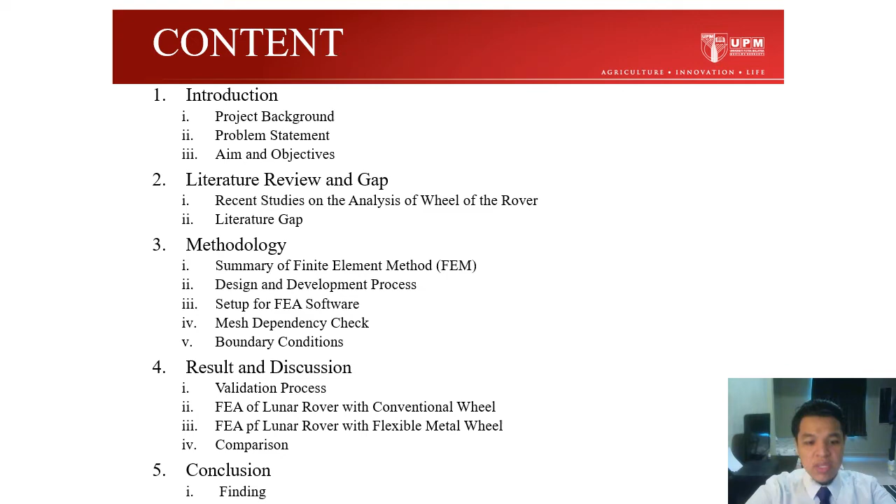My presentation for today will be divided into 5 sections: introduction, literature review and gap, methodology, result and discussion, and conclusion. So firstly, let's take a look at the introduction.

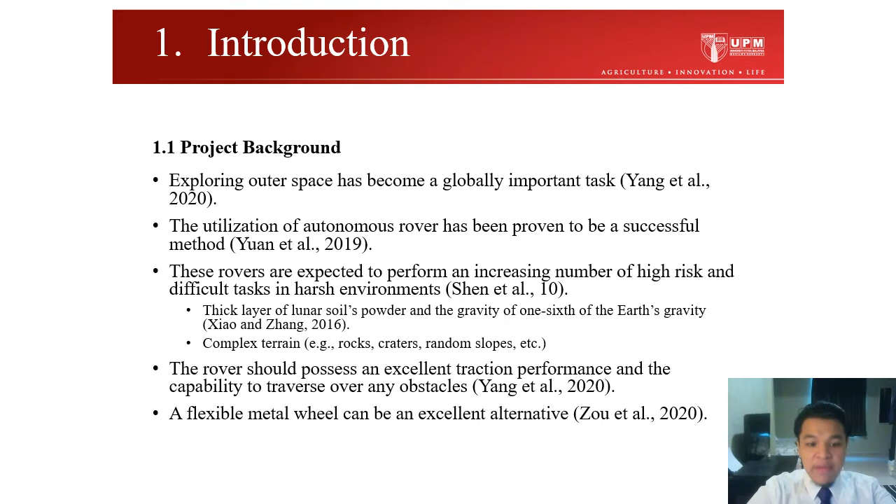First is project background. Exploring outer space has become a globally important task according to Yang et al. According to Yuan et al., the utilization of autonomous rovers has been proven to be a successful method, but these rovers are expected to perform an increasing number of high-risk and difficult tasks in harsh environments, such as a thick layer of lunar soil powder and gravity that is 1/6 of Earth's gravity, along with complex terrain like rocks, craters, and random slopes. According to Yang, the rover should possess excellent traction performance and the capability to traverse obstacles. A flexible metal wheel can be an excellent alternative, according to Zou et al.

Then we will take a look at the problem statement. A manned or unmanned lunar rover is typically loaded with a payload and travels over complex terrains. Conventional wheels, such as rigid wheels and pneumatic wheels, often impose a substantial amount of stress and strain on critical components of the rover, including the metal motor casing, drive shaft, and the frame.

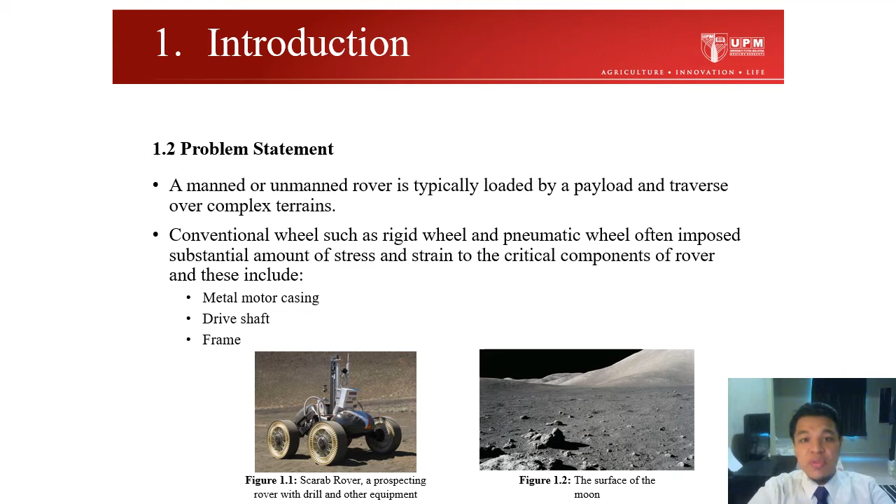Then, what is the aim and objective for this project? The aim of this project is to investigate the performance of the lunar rover implemented with conventional wheels, and second, to investigate the performance of the lunar rover implemented with flexible metal wheels. There are 3 objectives for this project.

The first objective is to conduct finite element analysis simulation of the flexible metal wheel design and validate it with the simulation data from Zou et al. The second objective is to perform static load simulation for both models, the lunar rover with conventional wheel and the lunar rover with flexible metal wheel. The third objective is to compare the mechanical properties and identify the location of concentrated stress and strain distribution between these models.

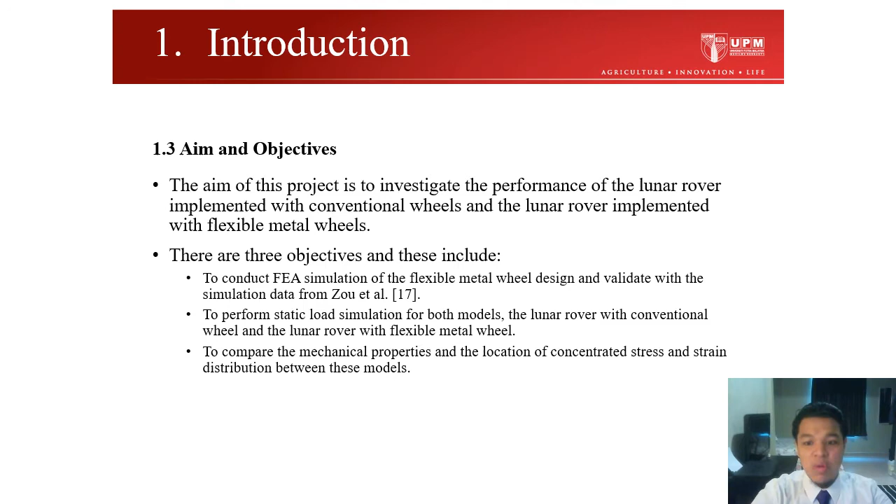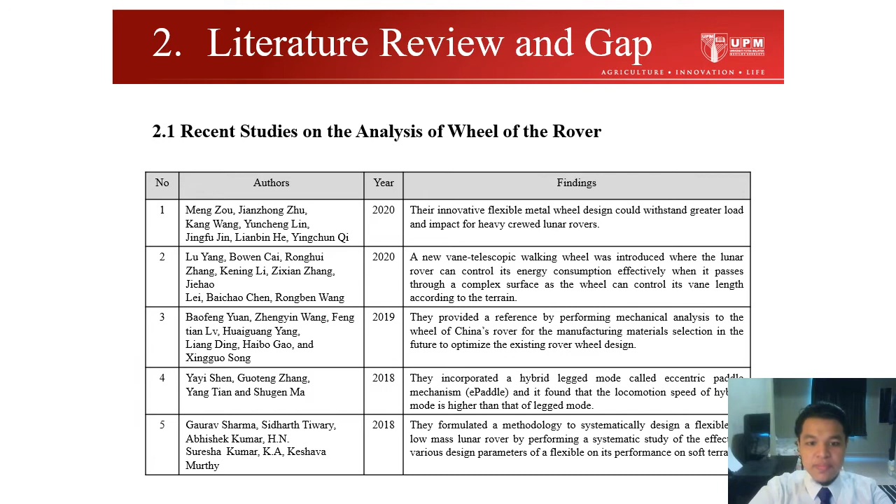As you can see based on the bar charts below, the number of literature findings according to the parts of the rover shows the wheel overcomes all of the major parts of the rover, instead of chassis or frame, suspension, bearing, and others.

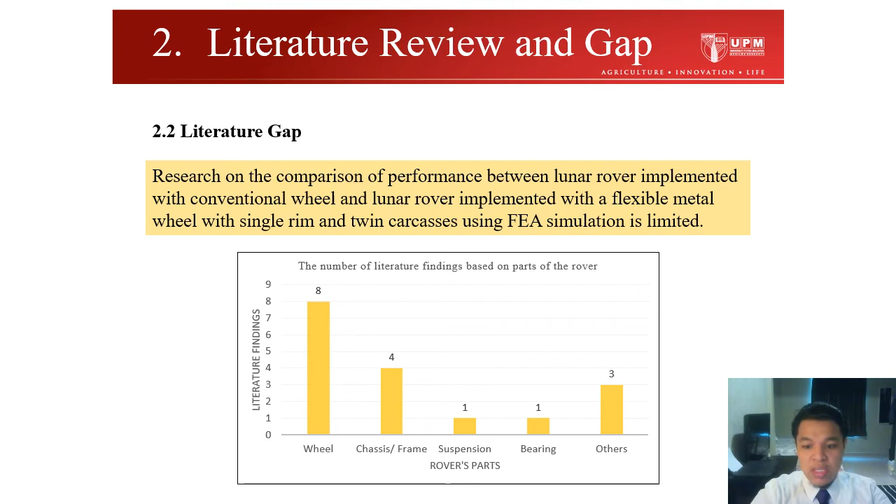So next we will take a look at the methodology. These are the summary of the finite element method. As you can see, there are 2 colors in the boxes, green and blue. The first color represents the responsibility of the engineer, while the second color represents the responsibility of the software itself.

As you can see in the summary of the finite element method, firstly we define the problem: the materials, the loads, the boundary conditions, and then we perform discretization or meshing process. Then we define the element stiffness matrix or variational method. After that, the software will assemble the global stiffness matrix and solve it. Finally, we perform post-processing and validation.

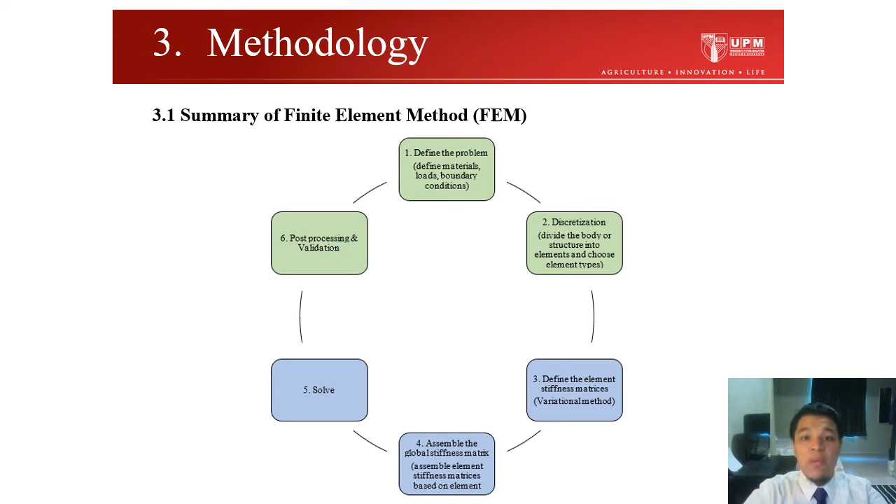So firstly is the design and development process. There are 3 models that were designed, including conventional wheel, flexible metal wheel, and lunar rover. These models were designed using CATIA V5R21.

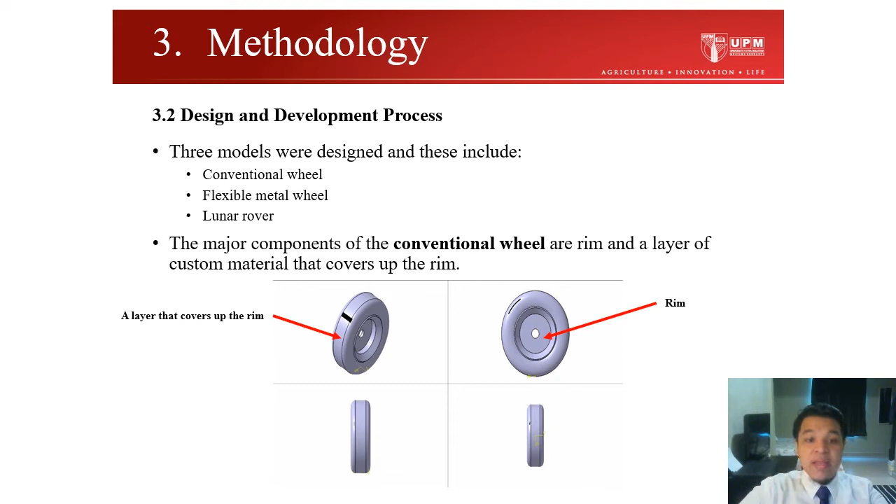So we take a look at the major components of the conventional wheel, which include a rim and a layer that covers the rim. Then we take a look at the second model, the flexible metal wheel. These wheels are composed of twin carcasses with 36 spring steel sheets on each carcass, a connecting ring, and also a rim.

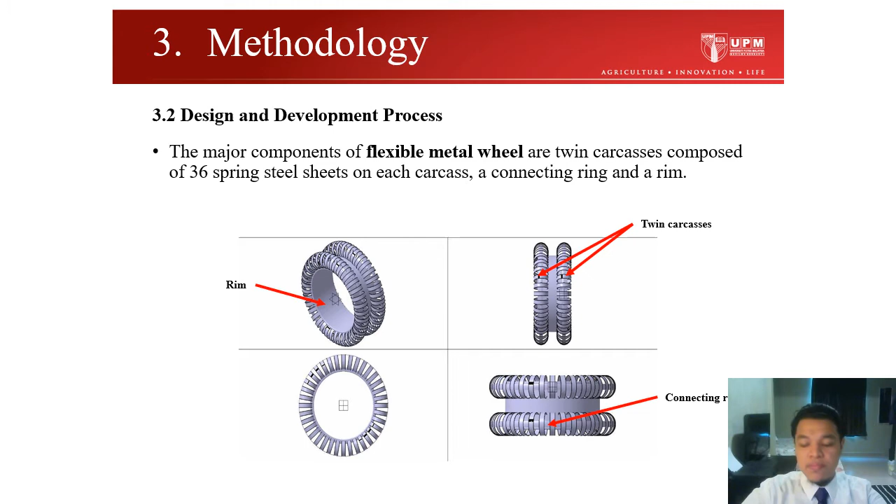Then we take a look at the lunar rover. The major components of the lunar rover include the rim, frame, drive shaft, and solid motor casing, also the base.

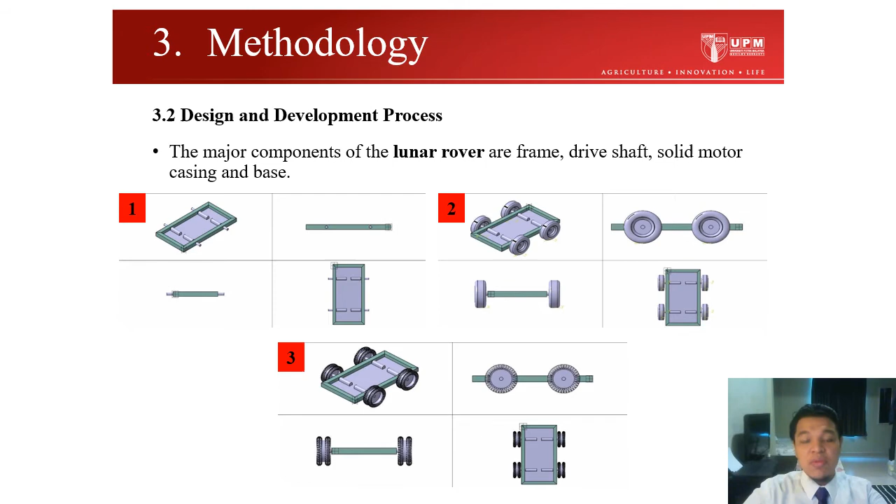Then these are the setup that I use for the finite element analysis software. Firstly is the material definition. Based on the models that I showed you earlier, as you can see for the lunar rover, all of the major components are assigned aluminum alloy. For the conventional wheel, the rim uses aluminum alloy, while the wheel belt is a custom material.

For the flexible metal wheel, the rim uses aluminum alloy, while the twin carcasses and connecting ring use a custom material. Based on the table on the right, the specification of the custom material is obtained from the research paper by Zou et al., as you can see right here.

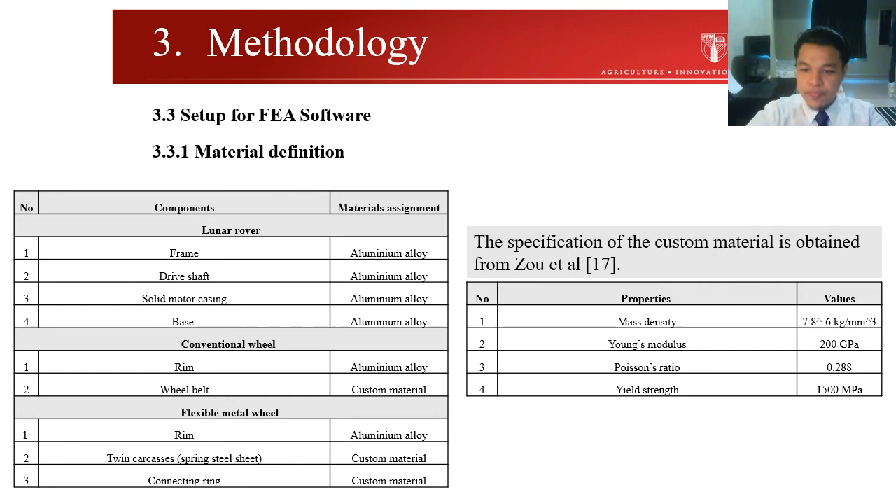And then for mesh generation, after we have designed and assigned all of the materials accordingly, we can perform the mesh generation after importing the 3D models into the software. The meshing process is done by utilizing ANSYS Mechanical, and it is crucial to determine which parts of the model need to be meshed and which parts do not. For example, the design of the lunar rover has been simplified by discarding the bolts, the nuts, the screws, and also the metal chains.

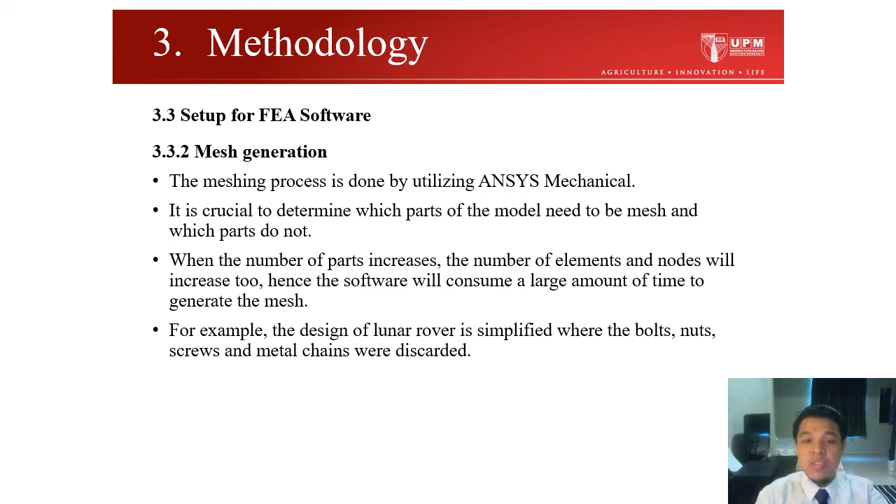Because if we increase the useless parts, in other words, the number of elements will increase, the software will consume a large amount of time to generate the mesh. So we try our best to identify which parts will not be used, and then we just concentrate on the parts that are crucial.

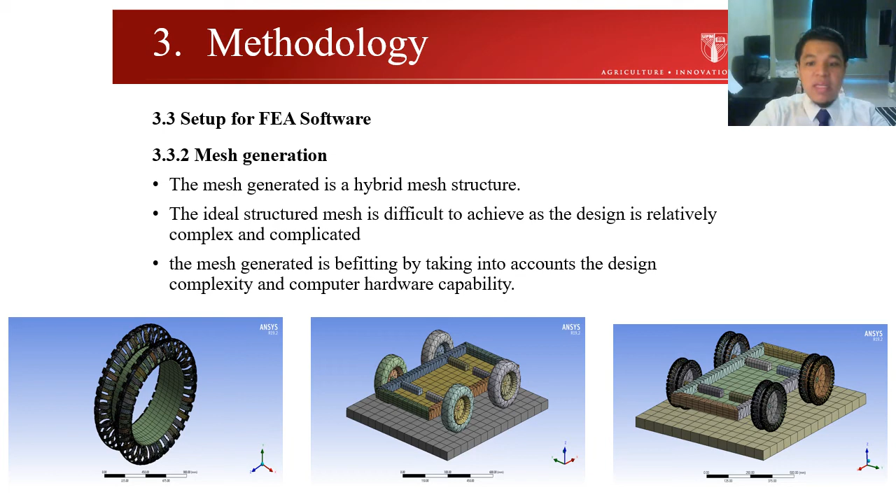So these are the mesh generated by each model by the software. The mesh generated is a hybrid mesh structure. The ideal structured mesh is very difficult to achieve as the design is relatively complex and complicated. So the mesh generated is befitting by taking into account the design complexity and computer hardware capability.

And then we have to perform mesh dependency check, because the result becomes more accurate when the mesh model is finer, and the computation time is greater as the mesh is made finer. The main objective for mesh dependency check is to obtain a mesh that balances satisfactorily the computing resources and accuracy. In this study, there are 4 numbers of elements used for mesh dependency check. These numbers are according to the slide that I showed.

This is the mesh dependency check for a lunar rover with a conventional wheel loaded with a 500 Newton load. The number of elements for the third solution, which is 213076, can be a modest option for the element number to perform static load simulation of a lunar rover with conventional wheels, considering the computation time and result precision.

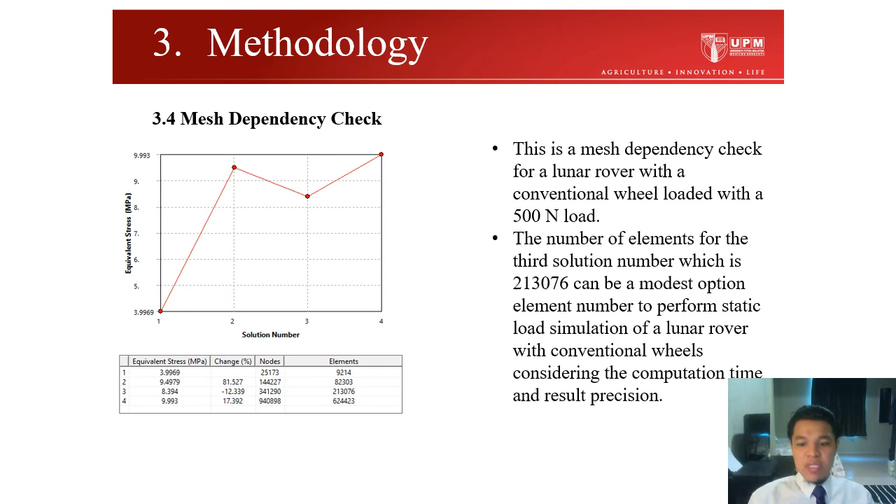During mesh dependency check, I encountered some problems - the software was unable to generate a finer mesh for simulations in the validation process and simulation for lunar rover with flexible metal design. This is due to the limited computation resources, as the solver had insufficient memory to get the solution, and unspecified specifications of some parts of the flexible metal wheel design, like the thickness and width of the connecting rim and the rim, are not stated in the research paper. So the solution to my problem is the simulations were conducted, but by using the default mesh generated by the software.

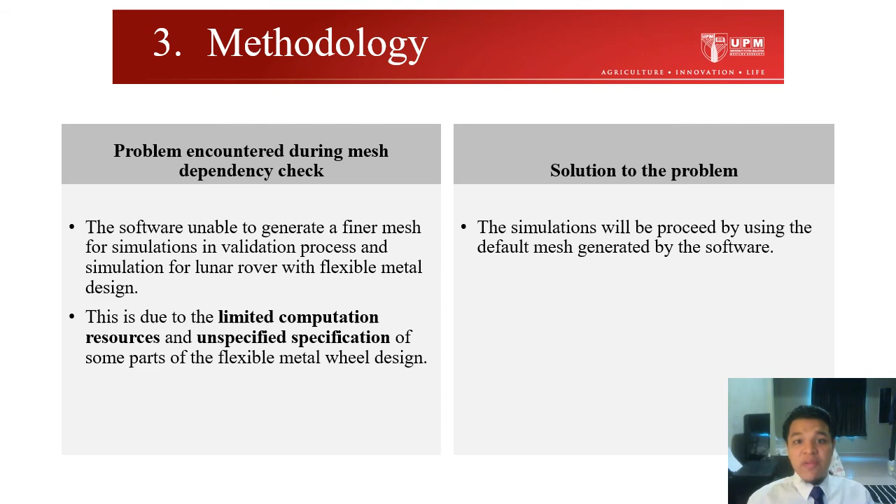So boundary conditions - these are the boundary conditions for validation process simulations, and also the static simulation for lunar rover with conventional wheel, and static simulation for lunar rover with flexible metal wheel.

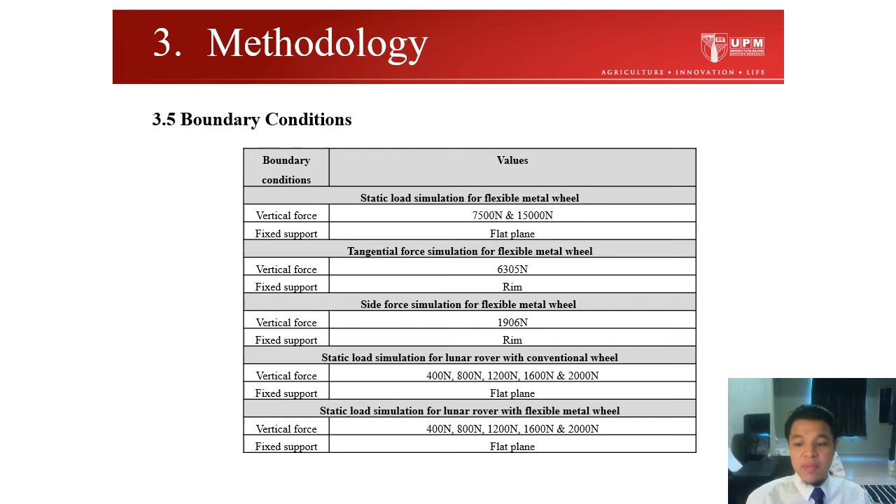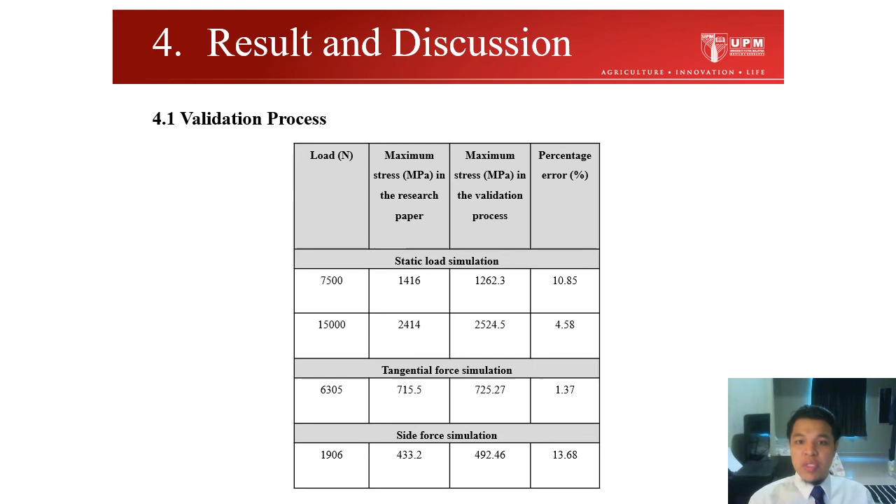So next we take a look at the results and discussion. In the validation process, most of the results tally with the research paper. As you can see at the percentage error, there are only 10 to 15% percentage error, meaning the design is valid to be used in the static simulation of the lunar rover later on.

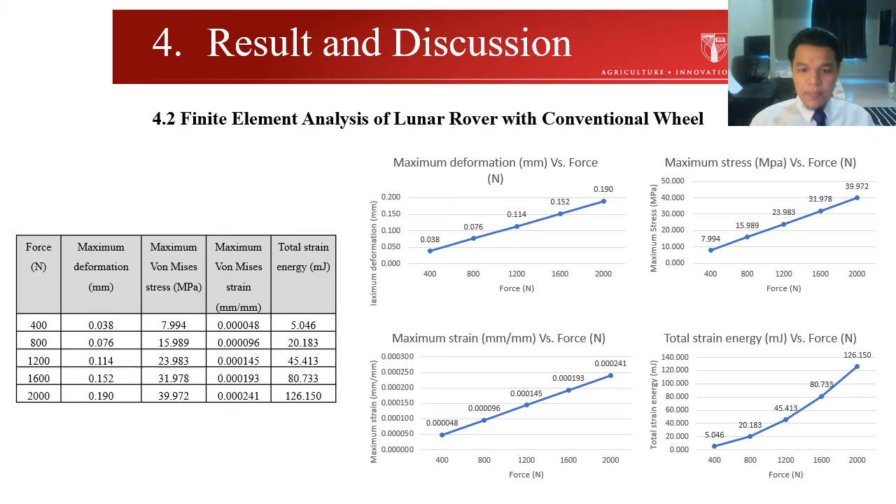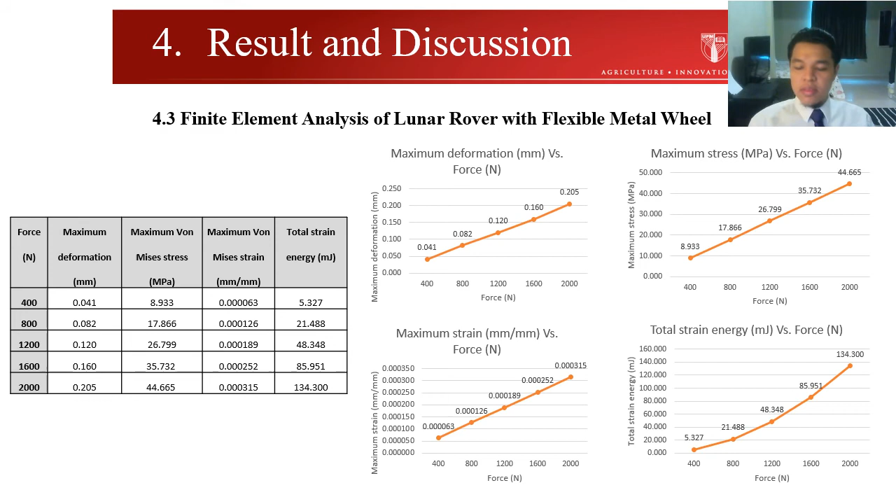So this is the results of finite element analysis of lunar rover with conventional wheel. And the finite element analysis of lunar rover with flexible metal wheel, and these are the comparisons of lunar rover with conventional wheel and lunar rover with flexible metal wheel.

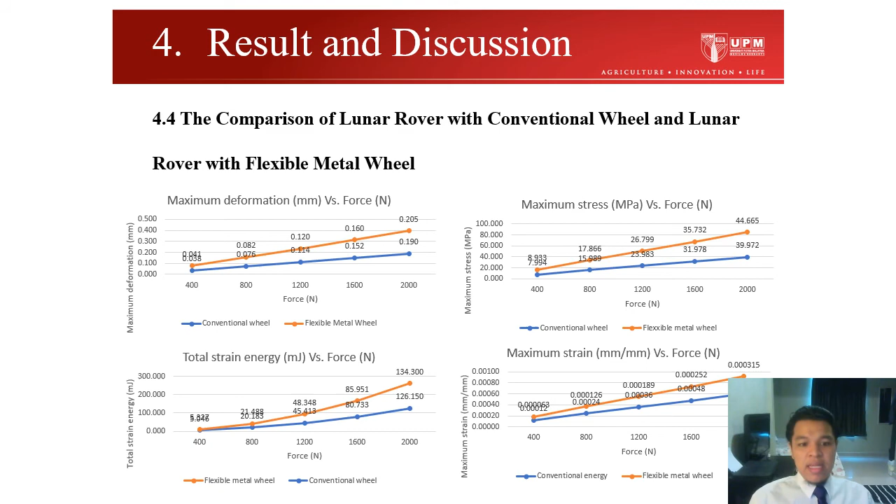As you can see, the mechanical properties of the flexible metal wheel are slightly higher than the conventional wheel - 7 to 8% for the maximum deformation, 11 to 15% for maximum von Mises stress, and 30% for the strain. The mechanical properties of lunar rover with flexible metal wheel are moderately higher than other mechanical properties. And for the total strain energy, the maximum percentage difference is only 6.46%.

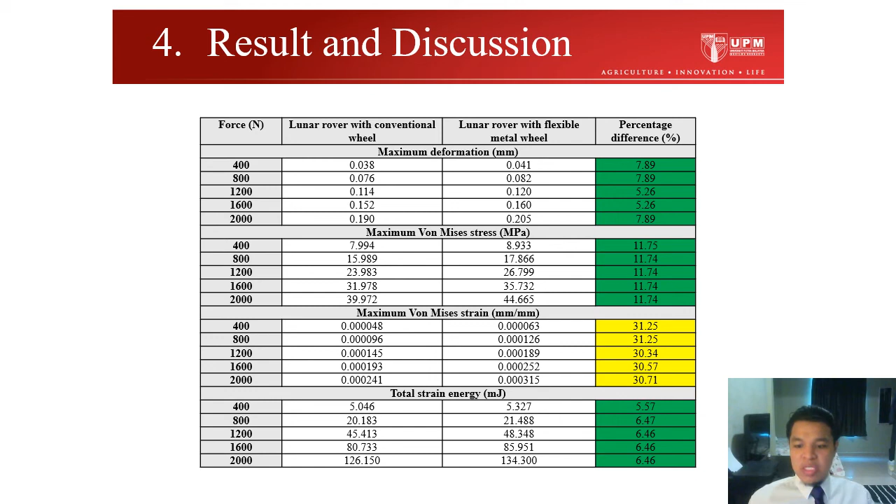Next, the location of the maximum strain is also located at the drive shaft, at the critical component of the lunar rover, while the maximum strain, on the other hand, when the lunar rover is implemented with flexible metal wheel, is located at the body of the lunar rover, or frame of the lunar rover.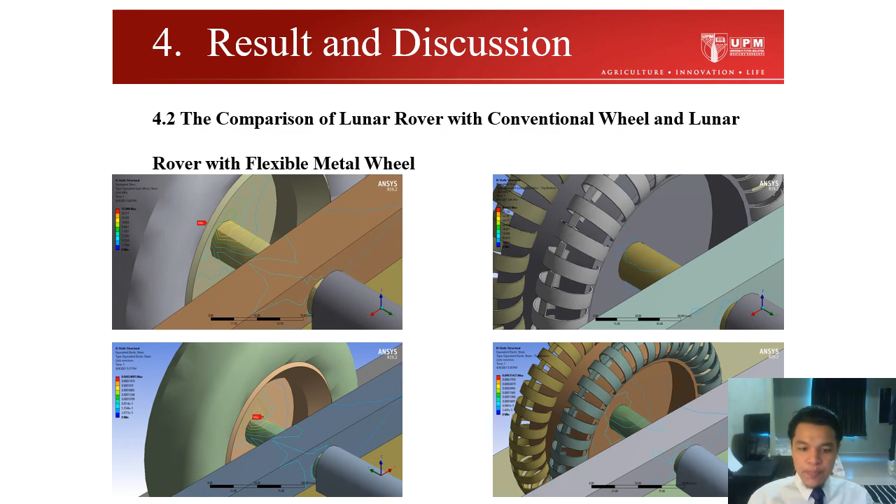So, conclusion: the mechanical performance between the lunar rover implemented with a conventional wheel and lunar rover implemented with flexible metal wheel are considerably similar, with only minor percentage differences, as you can see on the table that I provided earlier. However, the flexible metal wheel design, or the improved design, helps to evade the majority of the stress and strain distribution from concentrating at the critical components of the lunar rover, like the motor case, the drive shaft, and frame.

Furthermore, the wheel could act like a suspension that absorbs the energy, allowing the body of the lunar rover to traverse undisturbed along the uneven surface. Also, the improved design offers a higher strain energy, meaning the lunar rover can recover much quicker when it is loaded with an immense amount of load, compared to the conventional wheel. Therefore, we can conclude that the improved design has been proven to be a better way, as it provides a better design in impact absorption, especially on complex terrain for the lunar rover.